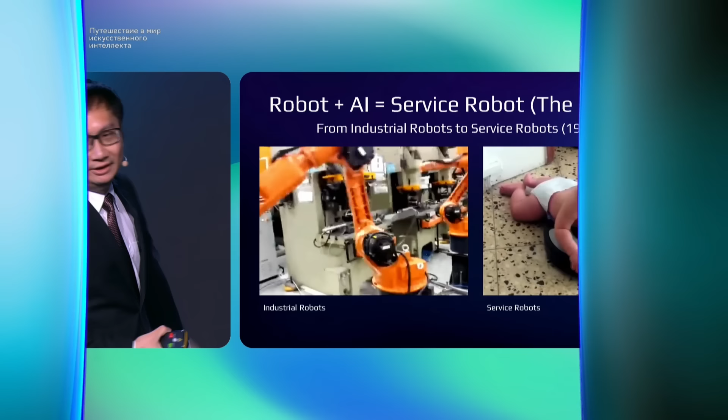So I'm going to turn back a few decades to show you some background. When I mentioned robotics maybe 50 years ago, everyone would talk about the one on the left-hand side, basically robots in factory. We call it industrial robots.

The peak was somewhere in the 1980s, where we used a lot of robots and increased our productivity. It is a good creation of humanity and brings a lot of value in our life, but it actually does very repetitive things. So what I can say is it is good, it is fast, it is strong, but maybe not that smart.

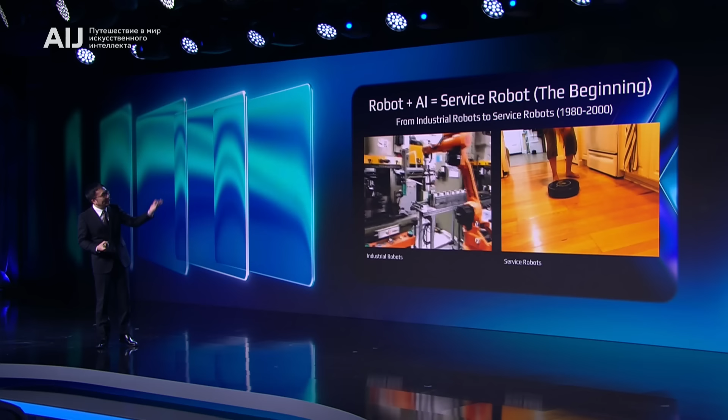So AI came into the picture somewhere between the 1980s to 2000. We started to think about how to make robots more intelligent, so we have another new domain of robots. We call it service robot.

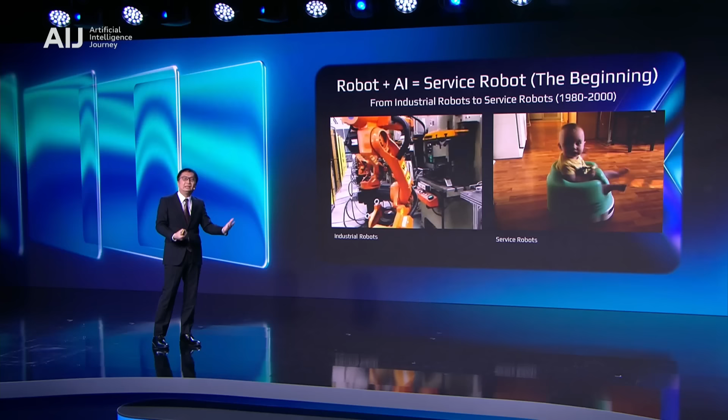We can compare between these two, on the left and on the right-hand side. The service robot basically does something out of what it's supposed to do, because in this video, the robot is not a cleaning robot, but instead it is interacting with the customer, which never happens in industrial robots, because industrial robots are designed to do exactly what they're supposed to do, and that's it.

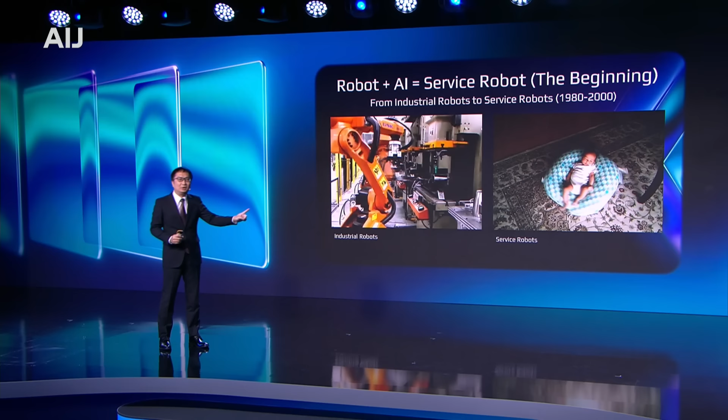But for service robots, it actually goes beyond, and starts to interact with humans. Of course, the first concern is safety, but how to interact with humans, especially when the robot's supposed to do something out of its scope. Like Roomba is not designed to play with babies. That interaction actually requires a lot of intelligence, and that is where AI comes into the picture.

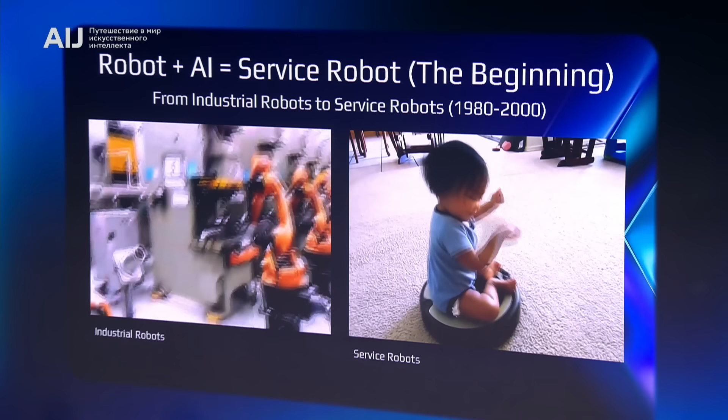So this is the direction of my presentation today. We can see after we had the Roomba, which is a success story of service robots, people started to think, what else can we do? So we started to add more and more intelligence into robots, and we created more and more smart robots.

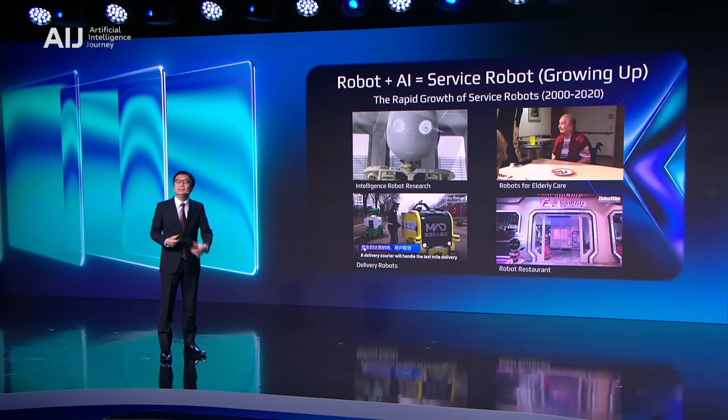We can see from intelligent robot research that happened throughout the years, throughout the world, a lot of robots start to get smarter, start to get better, and we also create a lot of new services. For example,

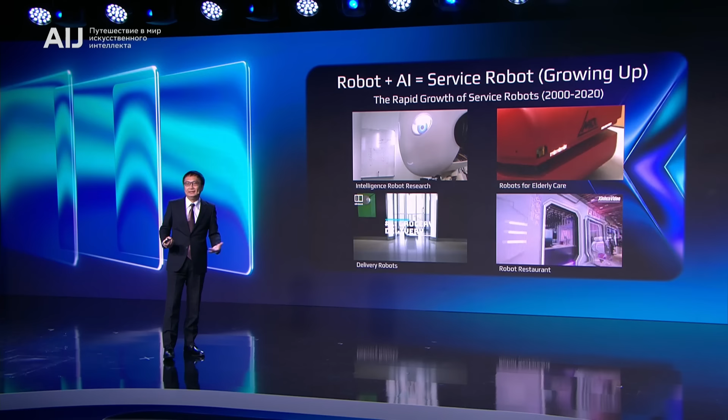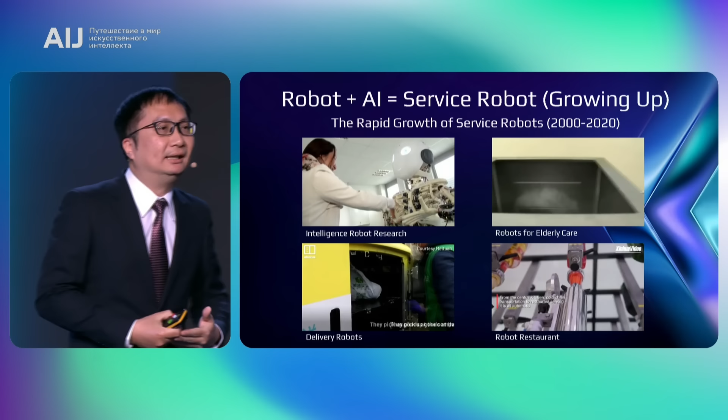In elderly care homes, or in children's homes, etc., there are a lot of facilities that require human care, but we lack this human labor. Previously it was done all by human labor, but now robots start to take over the position because they slowly acquire the intelligence to really fulfill the scope of the job.

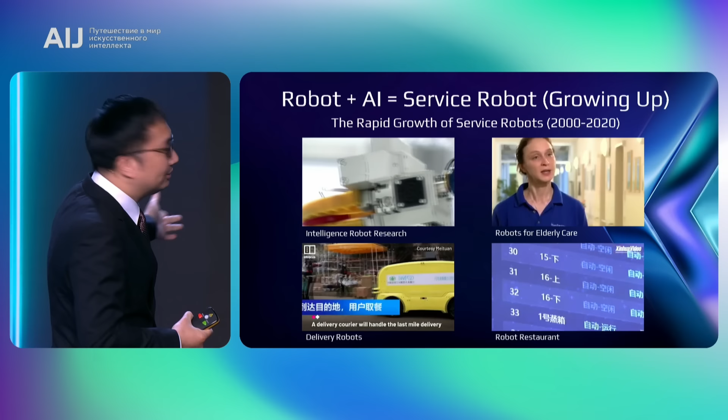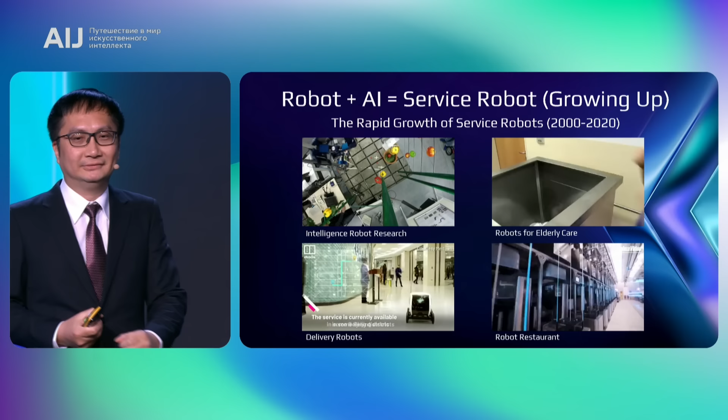As you can see, in 2020 we had COVID that paused the world, but that actually made a big push to robotics that we have seen, for example, delivery robots. So robots start to help us deliver our stuff.

Not only deliver food and medicine in hospitals, but also a lot of other things. For example, in hotels they start to take orders, in restaurants, not only just basic needs. As you can see on the right-hand side, we have very fancy things like robot restaurants.

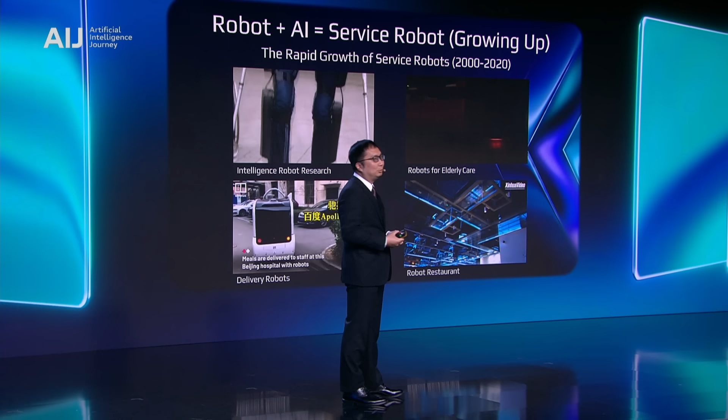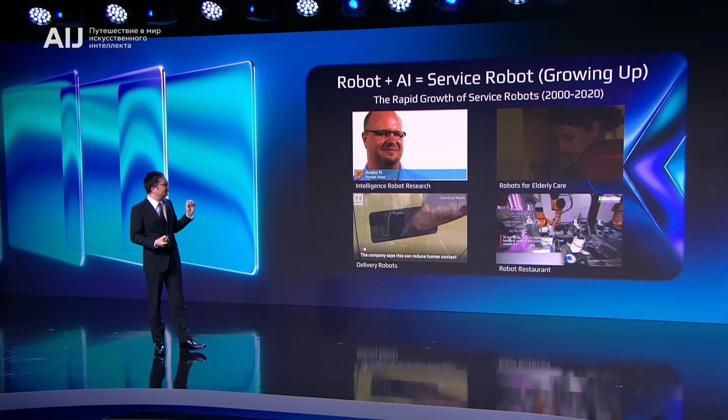So today we can see there are actually a lot, for example, robots making latte art for your coffee, and it's actually making it much better than a normal human being. So we can see once we add the intelligent part into robots, this service robot can give good service to us humans. So that is basically the growing part.

So now, how do we actually move forward from there? A little bit of background - I actually did this about 15 years ago, when I joined this competition called RoboCup at Home. It's a worldwide competition platform designed to call upon all the scientists and researchers around the world to discuss in a competition manner how we're supposed to design our next generation of service robots, or robots that help us in our home environment.

So actually, without realizing it, I was getting into what we call the embodied intelligence research direction. From there, we went from service robots to now talking about embodied intelligence. Okay, so this is the competition setting.

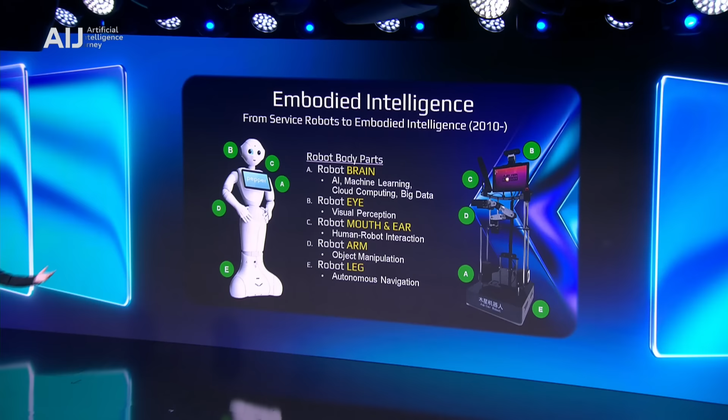As a comparison, when I'm building the robots, we can see that the robot has very similar components as humanoid robots, or what we call embodied environment, embodied intelligence. So I roughly divide it into these 5 parts.

So you can see the robot brains, which is the robot intelligence plus the AI - it involves all the AI, machine learning, cloud computing, big data, etc.

Then we have the eye, okay, the eye, just like human eye. So we use AI to make the robot see better, just like how human beings perceive the environment.

Then we also have the mouth and ear, which is like we give the capability using AI for the robot to communicate with each other like us humans communicate with each other. So that is the human-robot interaction.

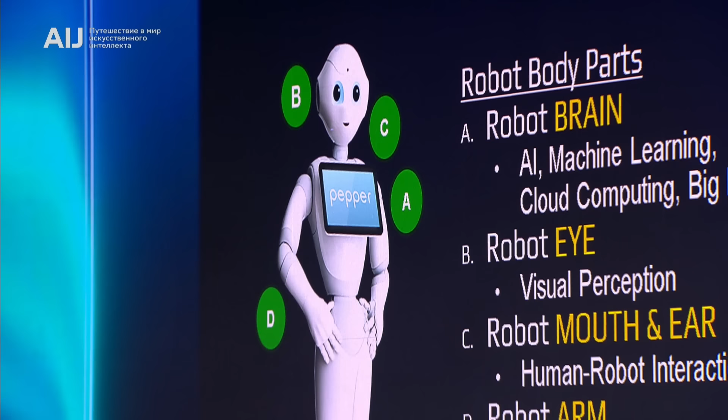And of course, robot arms, which is the object manipulation. So that is where we have physical interaction with our environment and with other human beings.

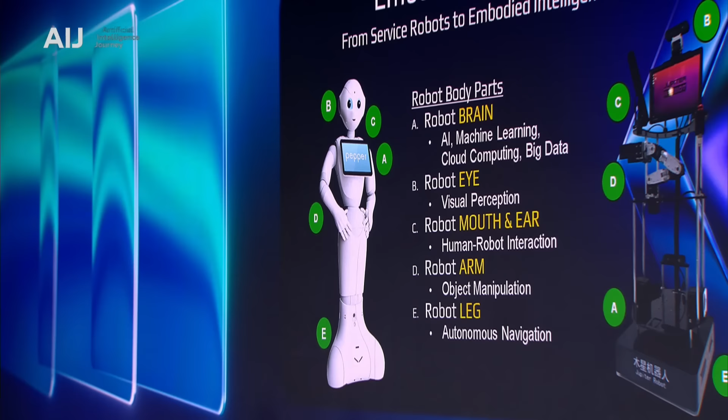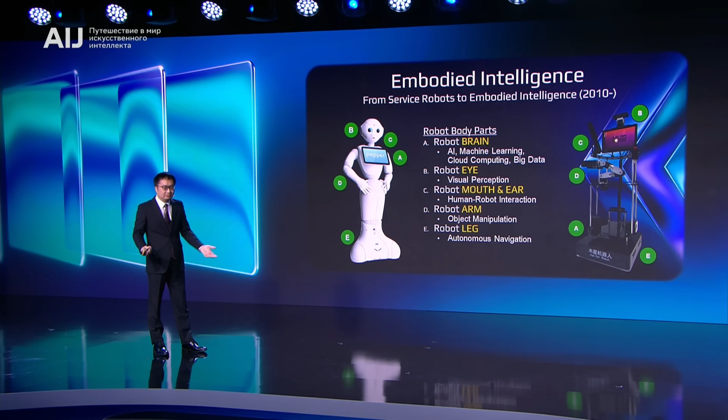And lastly, this was pretty much presented in the last presentation, which is the robot leg - the autonomous navigation. So now we know that robots are actually able to navigate not only outdoor but also indoor environments, moving around just like us humans, as long as we have the maps, as long as we have the coordinate system, and so on - which today we have all the sensors that help us to do that. So these are all the components that slowly build up embodied intelligence.

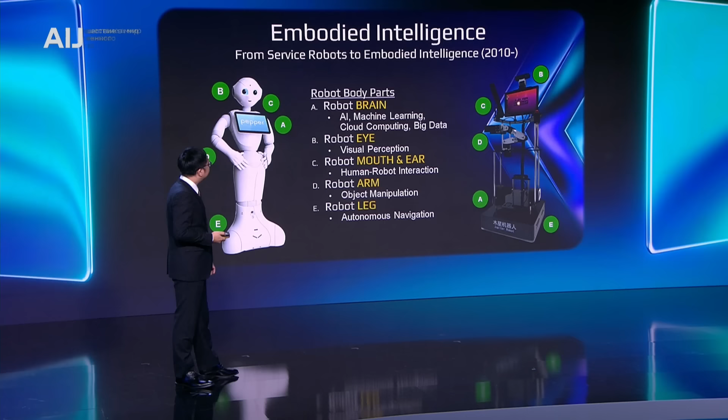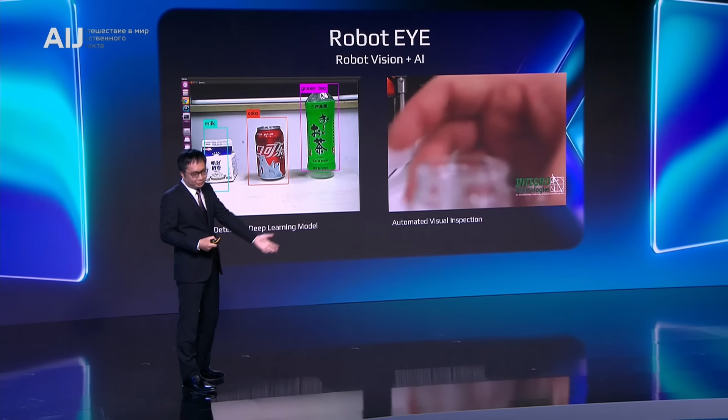Okay, so from here I would like to show you some examples. For example, in vision, over the years - last time I still remember when I was in school, I used a very primitive way to make cameras take photos and understand what is happening in the environment, doing pattern matching and so on. But as AI grew, or AI advanced, today we have machine learning and even deep learning.

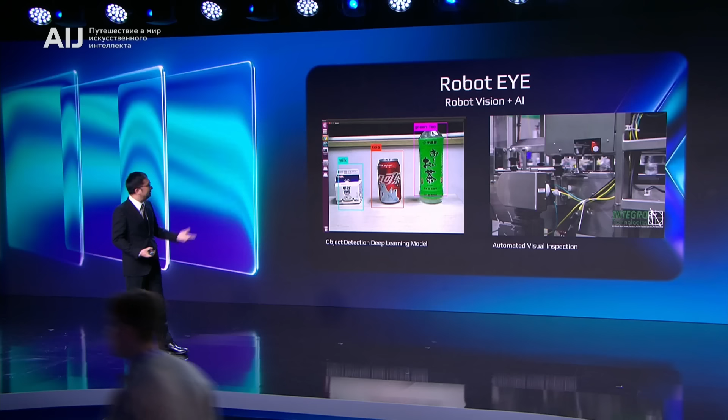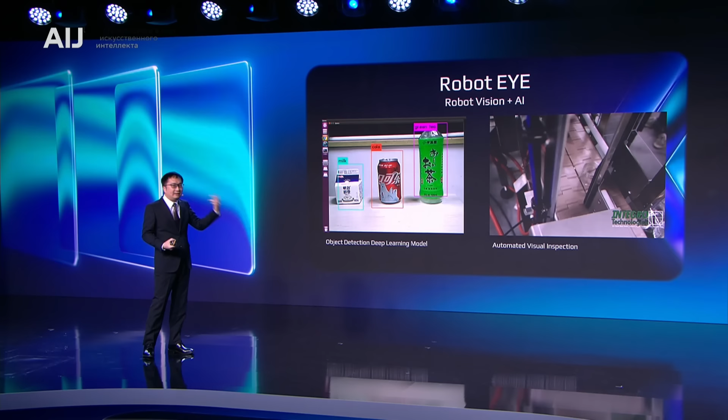For example, on the left-hand side, we have the deep learning model that actually helps us, in real time, understand what those things are in front of you. And this thing can be trained to get very high accuracy that we can use in industry, for example, in automated visual inspection, shown on the right-hand side.

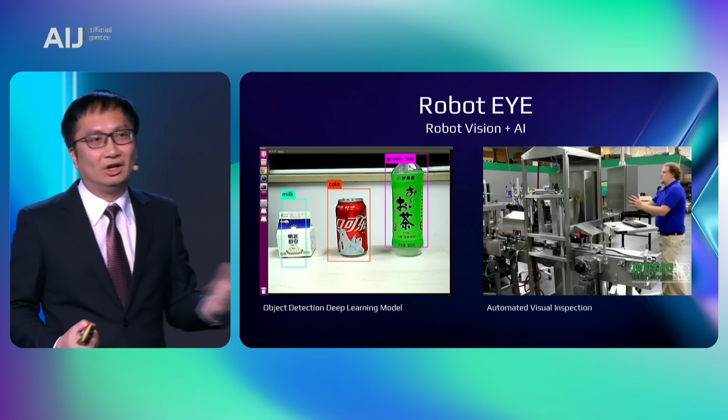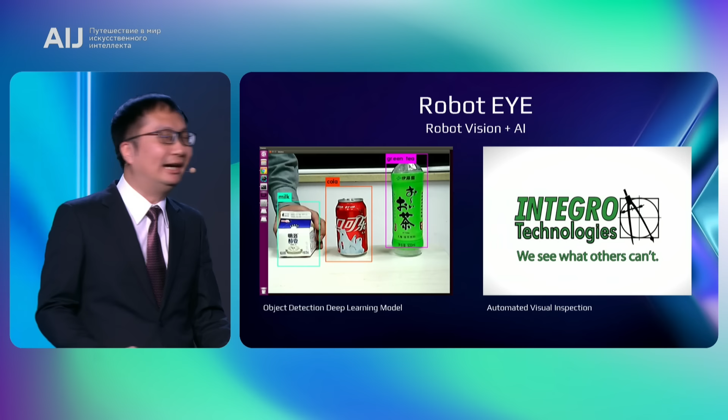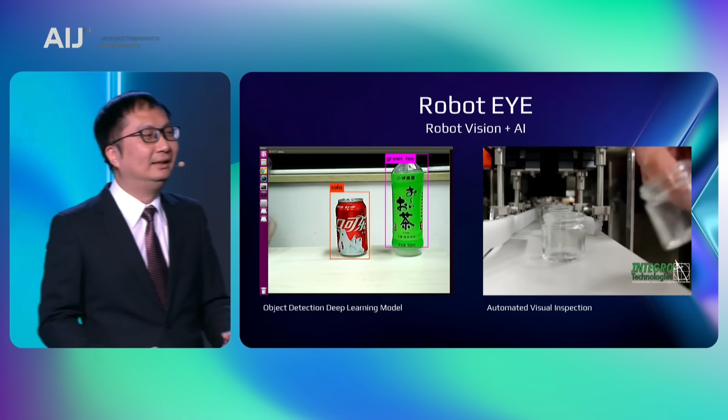And this technology keeps advancing because today we have, as mentioned in the previous presentation, the VLM - visual language model - which we don't even need to train for a particular case. Now, if we can just connect to those big VLMs that are available, our robot can just understand what an apple looks like, or what a bottle looks like, etc. So it actually goes very far with AI.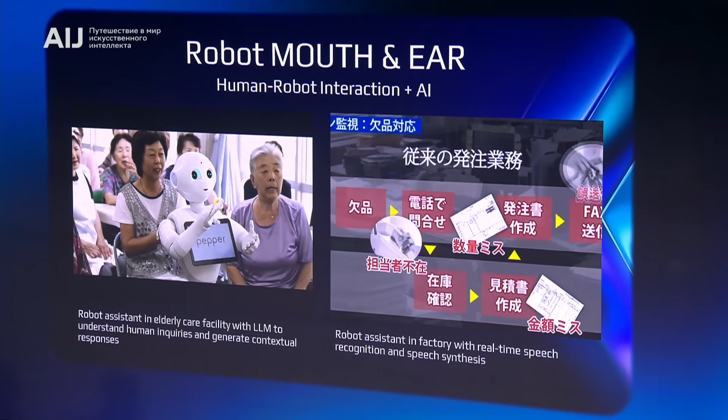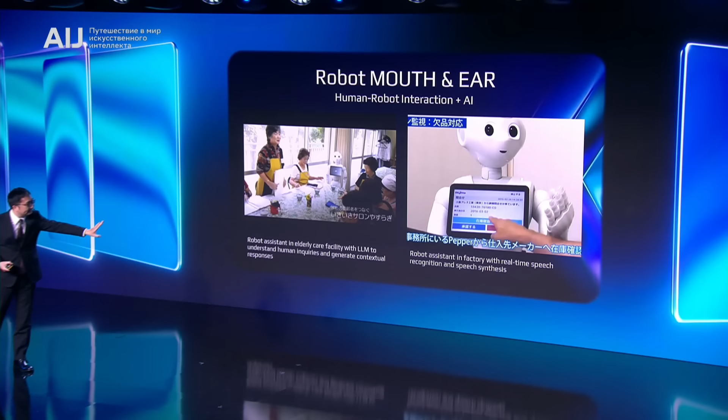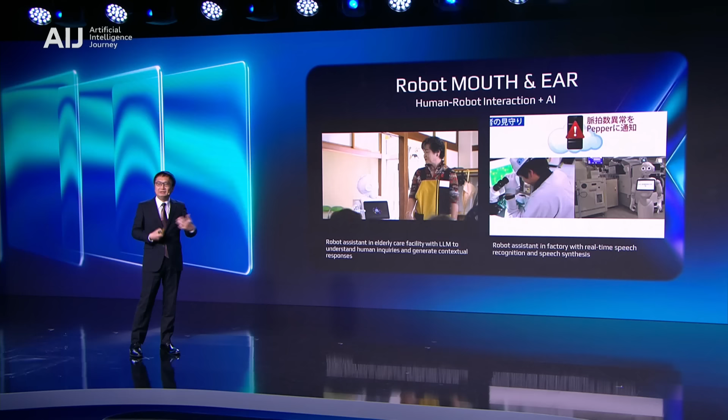Today, human-robot interaction is getting very complex, as you can see on both sides, whether it's in a domestic environment like an old folks' home, or in a technical factory environment. This robot has a lot of intelligence thanks to our large language model that enables it to interact. We also have excellent speech recognition and speech synthesis technology that enable this robot to communicate very naturally with humans nowadays.

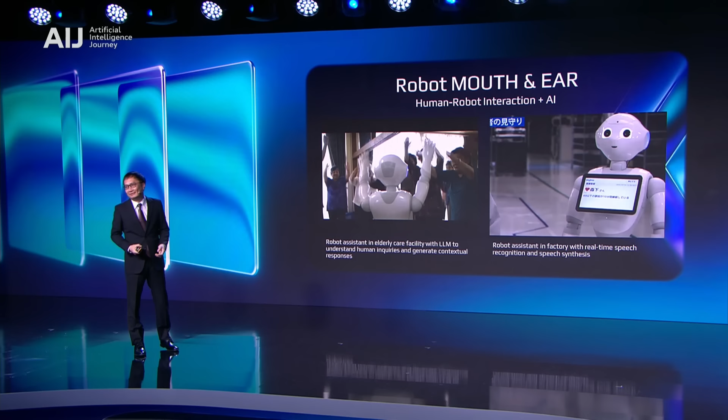You might realize you don't actually feel weird talking to robots anymore. AI has brought forward this human-robot interaction, and I believe in future it won't be weird at all when humans start communicating a lot with robots. Maybe some of you now can have a very lengthy chat with ChatGPT or something like Giga Chat.

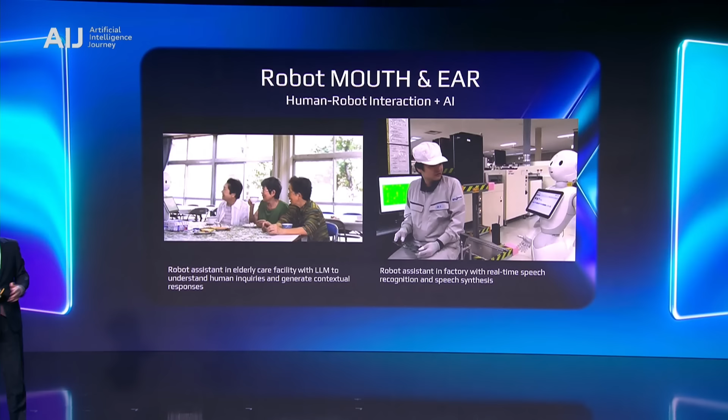Of course the next thing is manipulation, so physical manipulation. We have mobile manipulation. In a factory, when we want to do pick and place, it is very simple because everything is controlled, we have precise measurement for everything. But in a home environment, it's a totally different story because your fork, spoon, and plate at home and at your neighbor's house are totally different. How to precisely manipulate all these objects requires very high intelligence, and that's where AI comes in. Not only for mobile platforms, we can even put it on a legged robot.

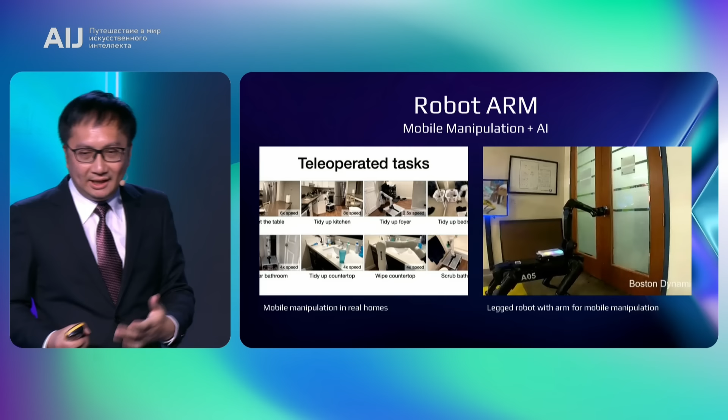Manipulation done by robots can now reach a lot of difficult challenges or tasks in mobile manipulation, thanks to AI coming into the picture.

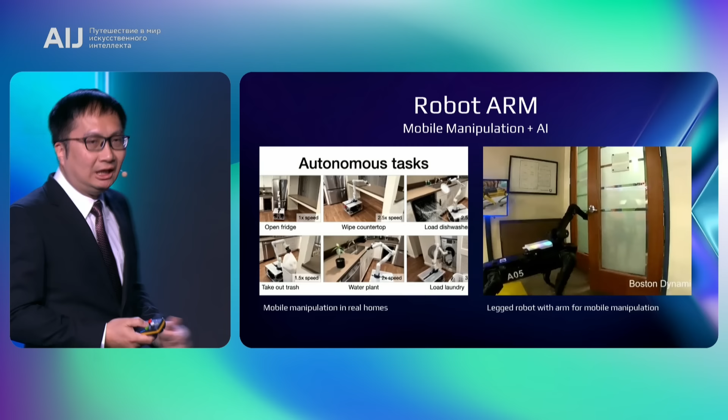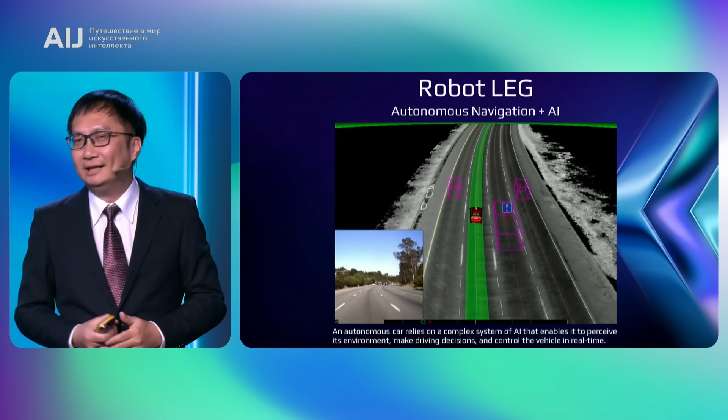This is a part I don't need to explain much since the previous speaker already told you a lot of stories. With the autonomous navigation technology we have nowadays, robots are now able to navigate. They're able to drive cars, able to bring us everywhere because they know their location, know the maps, and know where to go. This can also be applied indoor, outdoor, or anywhere.

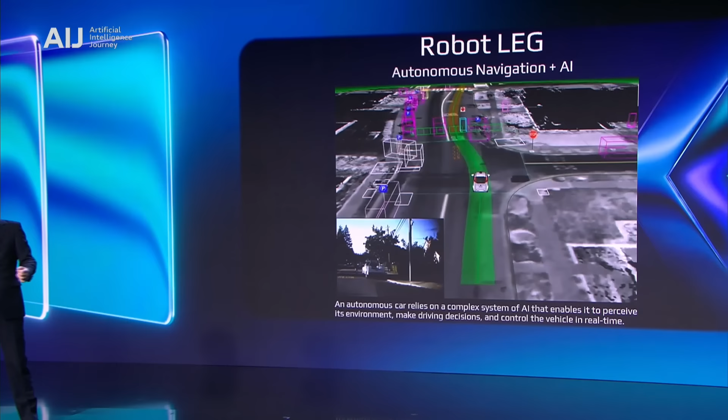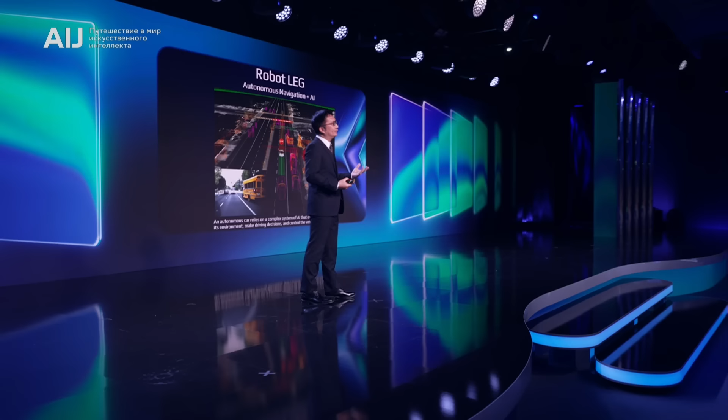Robots can now safely move around thanks to this technology and the advancement in AI. We're even now talking about using large language models to make robots able to move somewhere with very vague input, for example 'please go bring me some water.' The robot will understand where to get the water, etc. So pretty much the navigation part is already solved, thanks to the advancement of AI.

But last but not least, of course, is the brain. We had robot intelligence previously, but now with the enhancement of AI, we've opened up a new domain. As mentioned by the previous speaker, we have what we call VLA - visual, language, and action. These are the three parts.

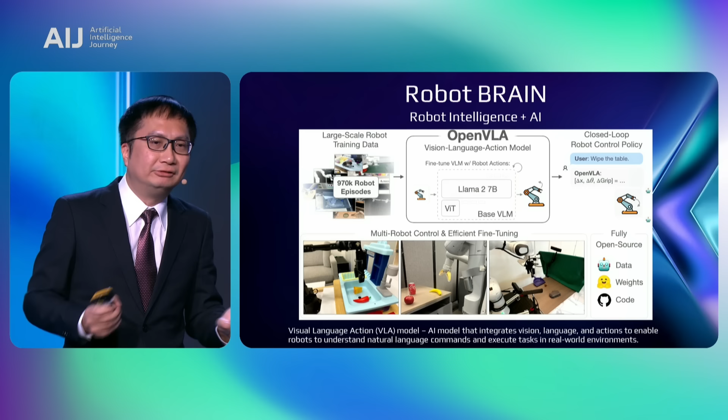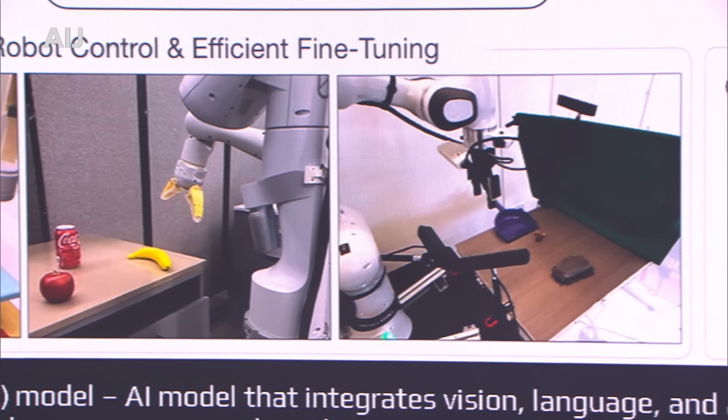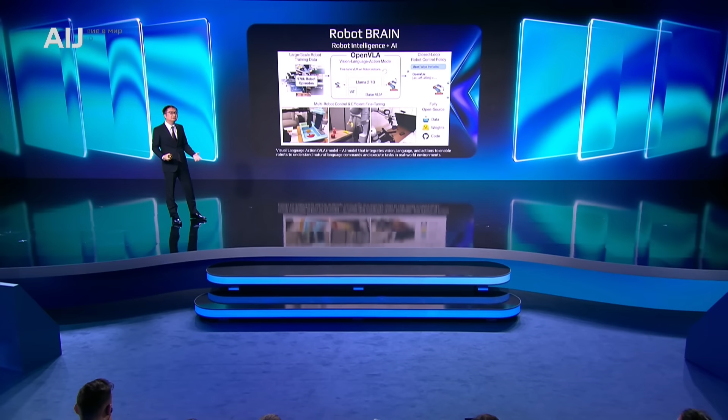Similarly like LLM, where we try to find the relationship between words, here with VLA we try to find the relation between visual (images), language (our description in language), and action (how we do something) - for example how you eat, how you walk, how you tidy up the dining table, etc. We combine all these things using LLM technology and transformer technology to find the relation between them, and that helps teach robots how to perceive the world and perform actions so they can complete tasks.

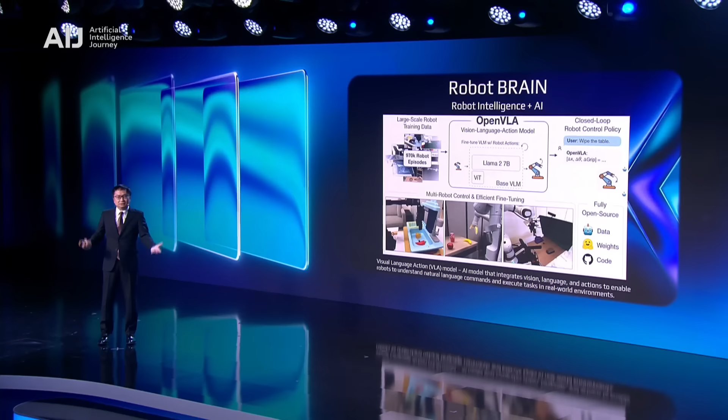So a VLA model is an AI model that integrates vision, language, and action, enabling robots to understand natural language commands and execute tasks in the real world. But of course this is very new research and state of the art, and there are still a lot of debates about world models - how we should perceive and understand our world. I feel this is a very interesting research direction going forward from now onwards.

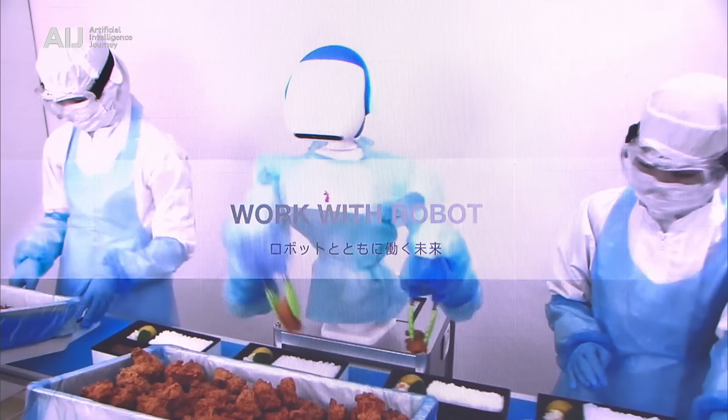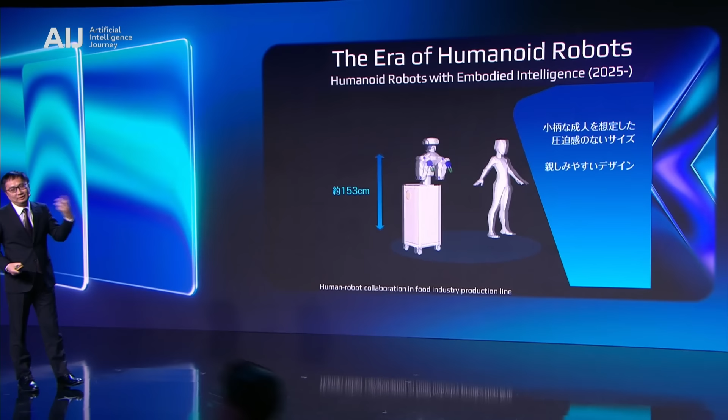So let's come back to humanoid robots. I've shown you how AI empowered robots so that we can achieve what we call embodied intelligence. When we apply this into a very special species of robot, the humanoid robot that looks like human, it ultimately comes to what we dreamed of since we started building robots.

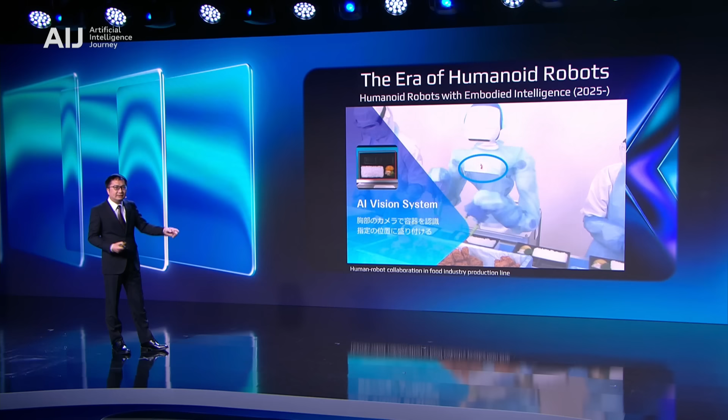As you can see, this is some work I collaborated on in Japan, where they started building humanoid robots to help in the production line. Here is the food production line. Just to confirm, the one in the middle is a robot, and the ones on the left and right hand side, they are humans.

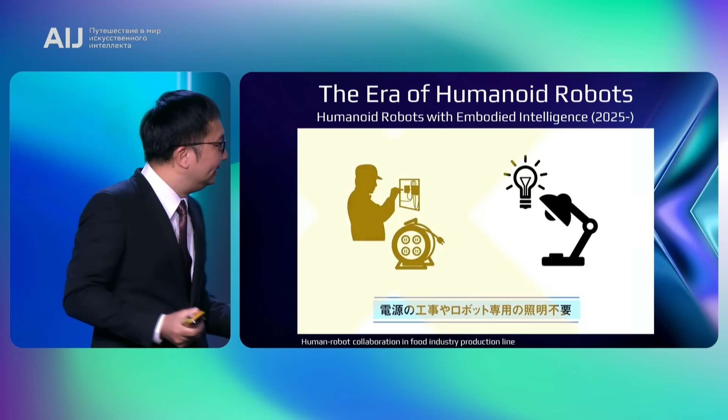It looks very similar now. This robot is able to share the load, trying to understand how humans pick up the ingredients so that they can assemble them into a box of food. I think that's the first step in introducing humanoid robots into a real use case that provides productivity or real value in an industrial setting. But ultimately, we hope robots can help us do our whole housework at home.

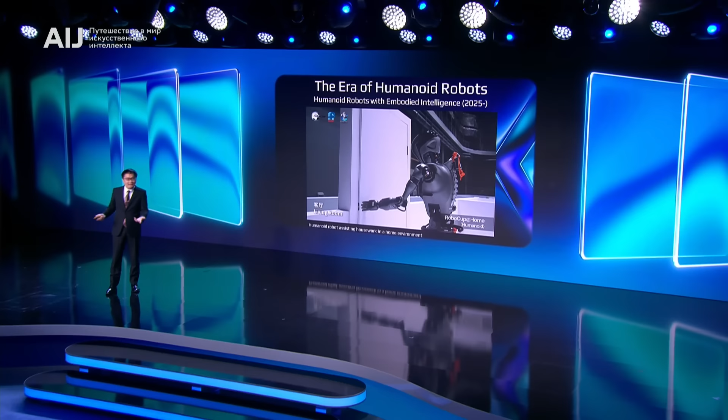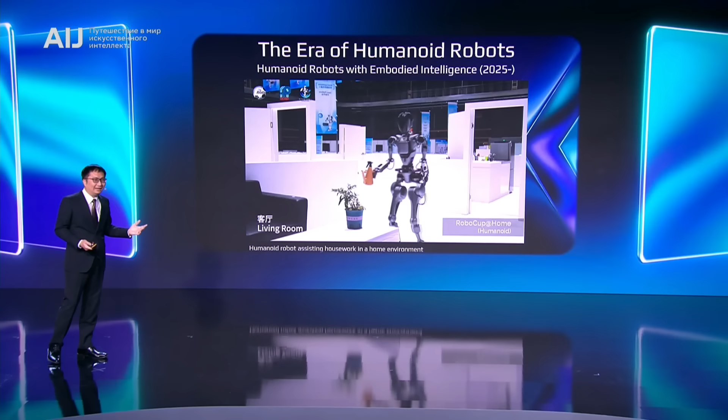I believe everyone who talks to me is asking me when robots are going to help them do their laundry, prepare their meals, and so on. I believe everyone is asking that, right? So we are working on that, and now we almost have all the ingredients assembled. I believe in the near future this exciting development is going to happen. We really hope so, and we're working hard for that. You can see with this platform we're trying to make it a reality.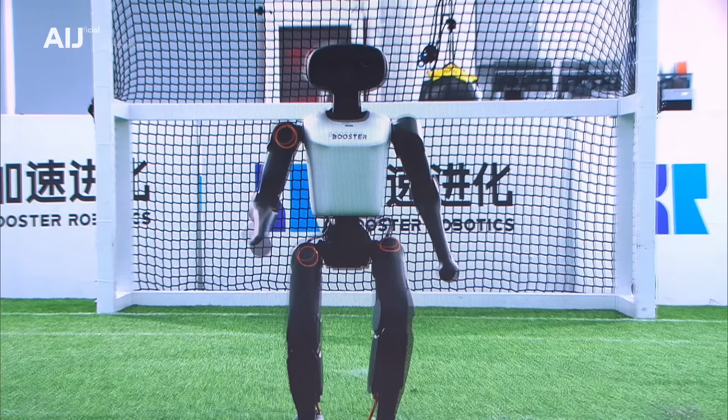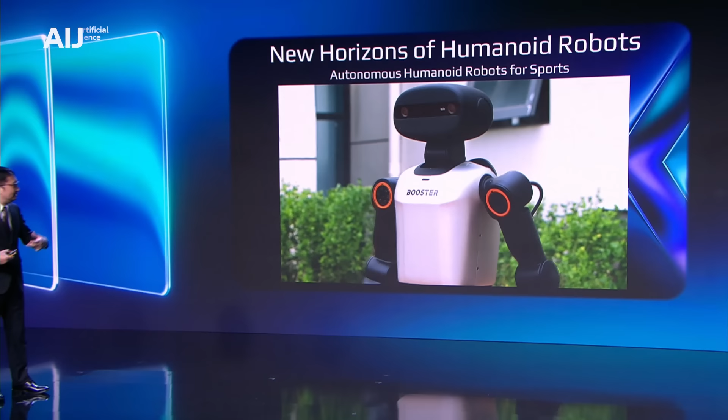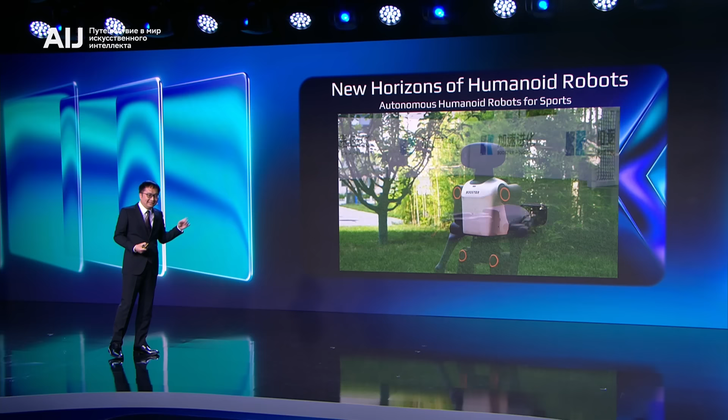But the last part of my presentation today, I would like to show you another new domain. We have robots that are able to move around like humans, and it's getting much smarter, much more agile, with higher dexterity over time. As you can see, the robot in the video is getting much stronger - it can fall down just like a normal human being, but it can actually come back up, just like a human.

So maybe another domain that humanoid robots can go into is sports. We try to put this robot onto the soccer field and start to play soccer. With that, we actually open up a lot of new things we're excited to explore, for example new forms of research, development, and education. We can see the full body motion, and if you want to play football, it's a multi-agent task - a few embodied agents fighting against another team. So it's very high level, and the perception, localization in the soccer game is very exciting.

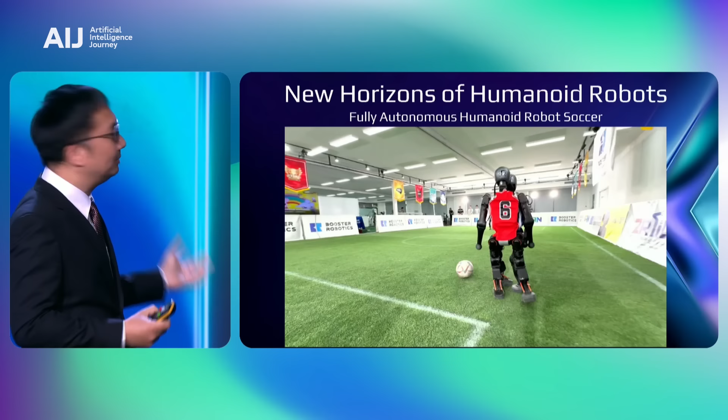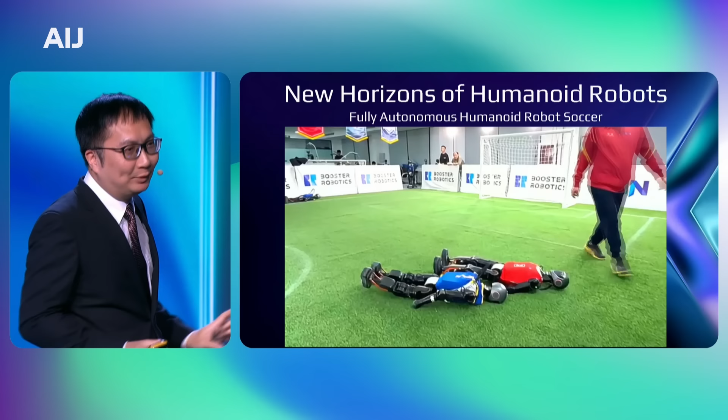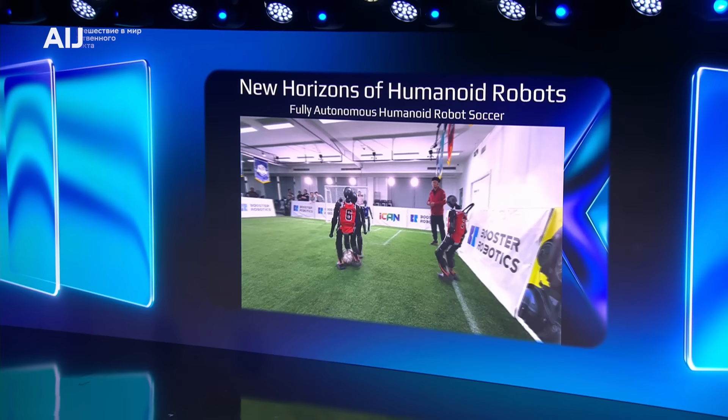We have done this for the past few years, putting it in such a way that we want to see how far this thing can go. Surprisingly, it gives very exciting results, as you can see. This video is the real footage we took, with no teleoperation. The robot falls down, then gets back up, and continues the soccer game, just like how we teach our young children to play soccer. This is a very interesting future that we really look forward to.

I can see that when we do this, it creates not just a simple soccer game, but a new world of sports and entertainment. Because for the past 2 years doing this, we have attracted a lot of sponsors, venues are booked, tickets are sold, we have hundreds of millions of views online, and more university teams are creating their own. We've become a new ecosystem for robot sports. Today is just the very beginning.

Over here, I would like to bring you this message: towards the new horizon of humanoid robots with embodied intelligence, let's build the future together. With that, thank you. I'm Jeffrey from Lattel Robotics, Malaysia.